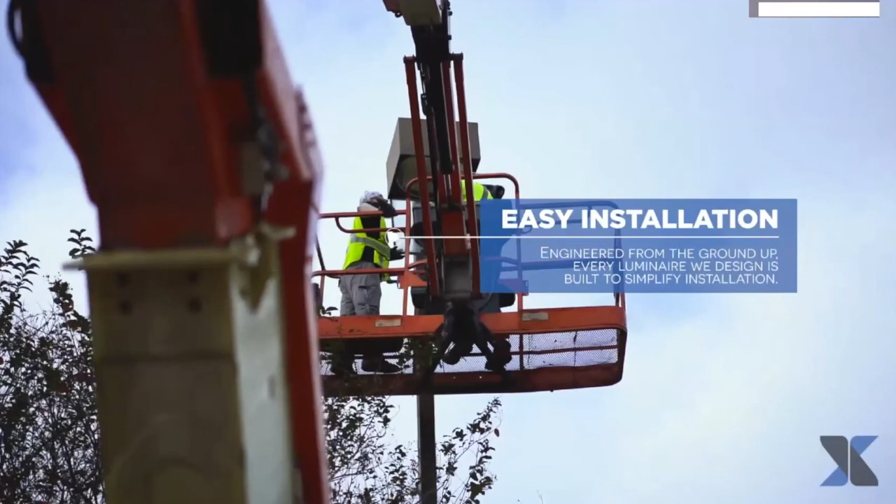As you can see in our web address, our URL, XLM, the M is for manufacturing. Today the term manufacturer has been stretched to essentially include companies that have grown their catalog by reselling someone else's products. At XtraLight, we're manufacturing our products. We have control and accountability. We're a vertically integrated manufacturer, and as our customer, this provides that increased level of comfort to you.

The vertical integration of our company provides for us being experts in 5 areas that we've identified as essential for our products. The first is engineering, testing, manufacturing, quality control, and on-time delivery.

I'd like to speak about engineering first. We're experts in engineering. We frequently encounter requests for mod to standard catalog items as well as custom. To define custom, for us it's a 100% customer design driven product. In addition, lighting layouts, application engineering, how about technical support? You can actually speak with the people who designed and engineered our products.

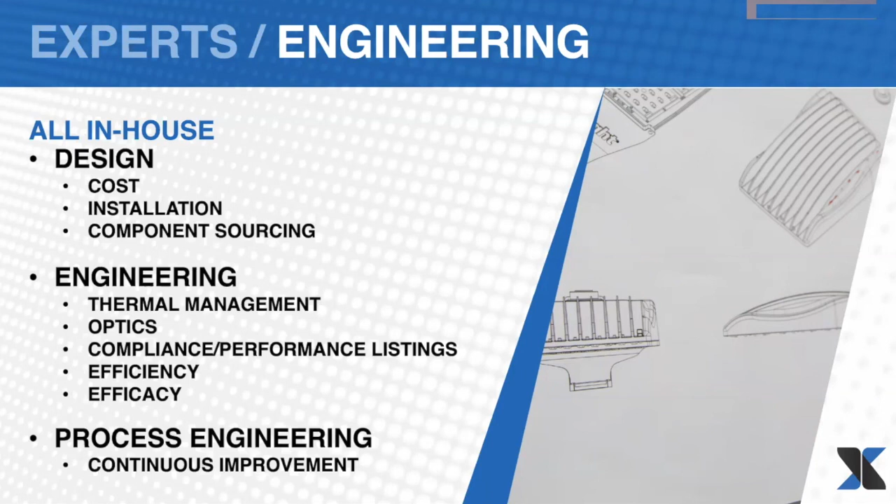Next, I'd like to speak about testing. At XtraLight, we own one of only 36 certified NVLAP labs in the entire country. As part of the compliance, we have a separate company, American Testing and Assessment Laboratories. While it's a separate company, it is still physically on site in our location, and you can see a number of photographs of our equipment.

We have 5 pieces of equipment. Our first is our goniophotometer. There are 3 classes, A, B, and C. We have a Class C. The Class C provides for both the mirror and the fixture to move and rotate a full 360 degrees. This allows us to capture all angle sets, any distributions, with accurate measurements. An example where this is really essential would be if a fixture has unique distributions - you have optics throwing light in specific directions. With our equipment, we can test for specific defined angle sets.

Our next piece of equipment is our integrated sphere. While our integrated sphere also measures the luminous output as the goniophotometer, we can generate that quick flash report. We mainly use this for color temperature and CRI. Now, our equipment has a larger spectrum than most equipment. Standard equipment is 400 nanometers to 800 nanometers. We modified and had our equipment recalibrated and recertified for a new spectrum, much larger, 325 nanometers to 1050 nanometers.

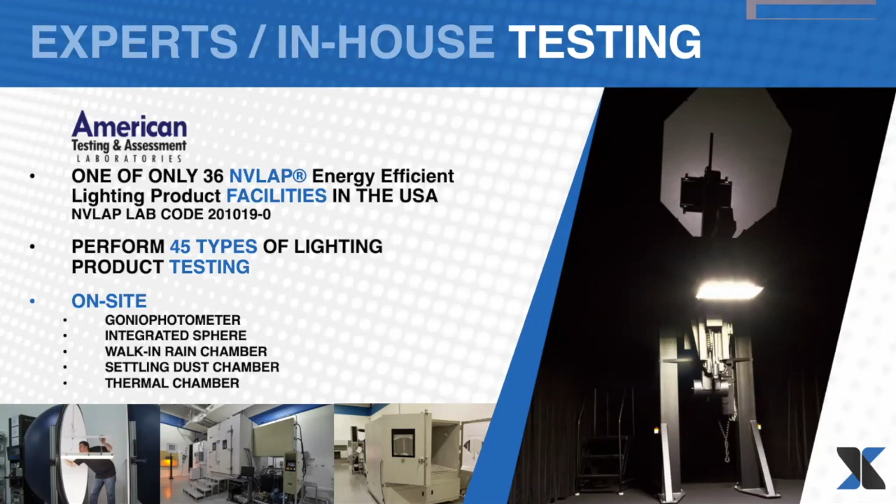Next, I'd like to speak about manufacturing. We own equipment, state-of-the-art equipment. We have 2 Trumpf 3000 CNC turret punch presses.

This allows us to punch up to 3/16 steel, almost 8 gauge. We have 7 Cincinnati press brakes up to 8 feet. We have an Amada fiber laser, that's what you see in the photo there. We also have a CNC roller, that's what we use for our ART and our ACR.

Next, I'd like to speak about quality control. And if ever there's a word filled with ambiguity, it's quality. What does quality mean to XtraLight? Well, at XtraLight, it begins with our 10-year warranty, bumper to bumper.

Next, all shop orders have attached electronic drawings, and we use 100% lot tracking in the factory.

Next, 100% first article inspection, and 100% every 25th article inspection. And that's not just for the final assembled luminaire. This also is our QC process for the component parts that we manufacture and go into the final assembled luminaire, end caps, housings.

Next, every LED board is 100% in-house single bin. We're not mixing diodes. There's a complete uniformity of color temperature. Why is that important? Well, as LEDs do not fail at once like fluorescent, and degrade over time, without single bin, the lack of color temperature uniformity becomes more and more pronounced.

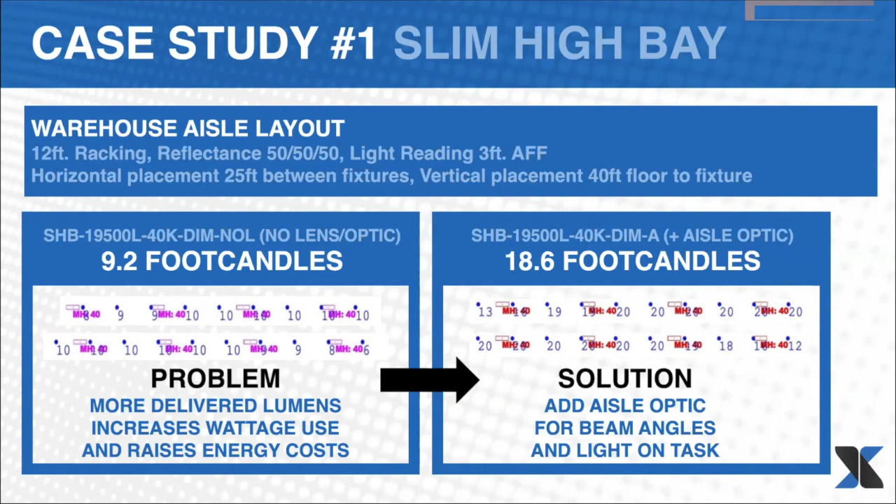In this case study, it was similar to the example Henry just talked about, where we were able to use specialized optics to hone the light in where it was needed, and we were able to bank on that extra energy or wattage savings to reduce the lumen package while still hitting the light levels we needed.

In this case, the customer wasn't too worried about electrical savings. Their main problem was quality control issues, which they thought were largely caused by poor lighting conditions, with supervisors unable to catch blemishes before products left the factory. The competitor on this job, when Major Tool asked for foot candle readings of 100 plus in most areas, responded by proposing to increase the wattage, which would increase the lumens and foot candles.

That light was honed in on where it was needed, and we accomplished the customer's goal of increasing foot candles to 100, while also yielding the customer a $250,000 per year energy savings as a secondary benefit to their primary goal of increasing foot candles.

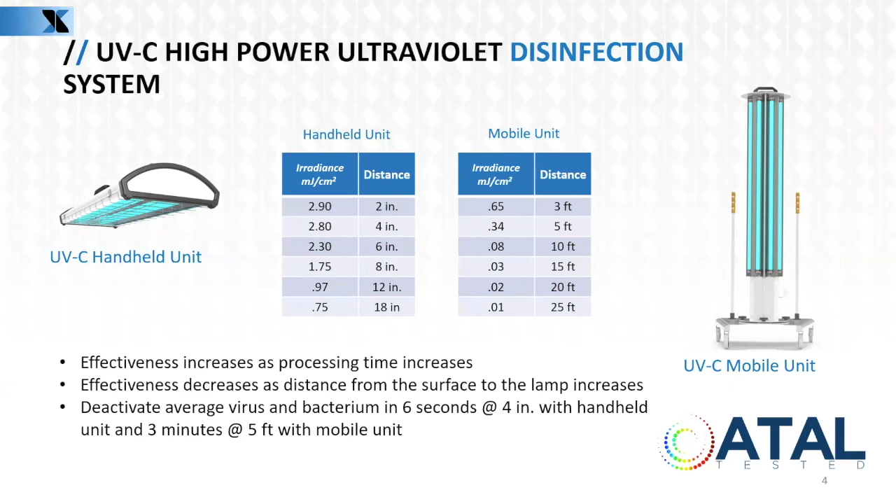So the handheld unit: it's very lightweight, very portable, used for tight areas or areas you may be constrained from accessing with the mobile unit, and for high touch areas you want to treat multiple times throughout the day, like desktops, credit card kiosks, lobbies, and things like that.

It's 2 feet long and weighs about 5.5 pounds. Total shipping weight is about 22 pounds, including all the PPE and the case it comes in. It comes with a nice mobile carrying case that has wheels and a handle, much like a carry-on bag when traveling. It comes with a 20-foot cord, and both the mobile and handheld units operate off a standard 120 volt outlet, so very common, easy to use, and easily acceptable.

It has a handle on the back and also a finger handle, making it easy to hold, with support for your other hand in case your arm gets tired. But like I said, 5.5 pounds, so pretty lightweight.

We use the 254 nanometer lamps in these. This one uses two 2-foot quartz glass lamps.

One question we commonly get is, why are we using lamps rather than LEDs, as LEDs are a more advanced technology? One reason was price. We wanted this to have an ease to market, and LEDs are $15 per diode prior to being placed on an LED board and installed into a finished good. So you need a large number of them to get the strength of UV light needed for it to be effective, and it would have tripled, maybe even quadrupled, the cost of the units if we went that route.

We'll move into the mobile unit now. Attached here is the mobile unit. It uses the same technology as the handheld unit, but in a 4-foot form factor rather than a 2-foot form factor. Each lamp still has the 1-for-1 configuration, so every lamp is paired with a ballast, and same scenario here: you're not going to have half your fixture go out. If you have a failure of a ballast, you'll only have one lamp out, and the unit will continue to be usable for disinfecting spaces until the machine can be maintained and a new ballast installed.

The height of this is about 5 foot, weighs about 65 pounds. Both the mobile and handheld units come with all the PPE you need to operate them out of the box, and they also come with some dosimeter cards, which I'll talk about in a bit. Lamps on this one still have the standard 9,000 hours and are still backed by XtraLight's UV warranty. The mobile unit operates at 320 watts and has some unique safety features I'd like to talk about.

The first one is dual power switches. The dual power switches are a unique feature that allows the operator to be intentional about the light being turned on—you're not going to be able to accidentally turn it on. You have to turn on the master power, followed by a secondary power switch.

The secondary power switch is Wi-Fi enabled and has a timer and an app embedded. That allows you to control the amount of time you want the unit to be used, and set treatment times based on how long you think it will take to treat a specific area, or based on dimensions and target areas. You can also turn the unit on and off based on that app, or just check the status to see if it's still on or if the timer has expired and the unit is now off.

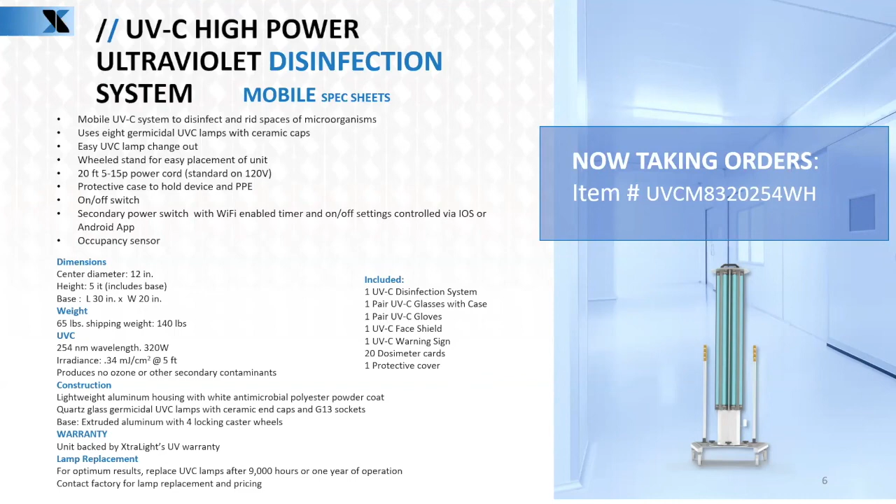Where can you use UV disinfection systems? You can use them essentially anywhere you have access to a 120 volt receptacle - locker rooms, schools, transportation, hotels, gyms, spas, retail spaces, restaurants.

A commonly asked question is, can you treat food with UVC? And the answer is yes. You may have some secondary side effects on the produce itself. For example, if you treat some lettuce with UVC, it may cause that lettuce to wilt prematurely, a little bit quicker than it normally would. That lettuce would still be 100% edible, and you would not have any secondary side effects due to any kind of contaminants.

All of our units do not emit ozone, so anytime our units are used to disinfect a space, they can be reoccupied immediately since there are no secondary contaminants.

How do we know UVC disinfection works? You heard me mention earlier that we include dosimeter cards with the purchase of either the handheld or the mobile unit. I have that picture here. This is going to be a key factor in validating that UVC works and that you're getting the correct dosage of UVC while creating a treatment plan. So that's your number one way to know disinfection works.

And the way this card works is that the center, which is yellow, will turn from yellow to orange when it's exposed to 50 millijoules, and then change from orange to pink once it's been exposed to 100 millijoules. We'll speak on these cards and the technology a little bit more in another slide.

You would be able to click on these once this presentation is shared. This is just some reference points that will help you convince customers that it is a valid technology when it comes to treating the coronavirus.

It is a small single stranded RNA virus that would reach approximately 4 or maybe even 5 log reduction with a UVC dose of about 30 millijoules. So if you're treating your target spaces at 50 millijoules, you're going to get well beyond that recommended 3 log reduction for like viruses.

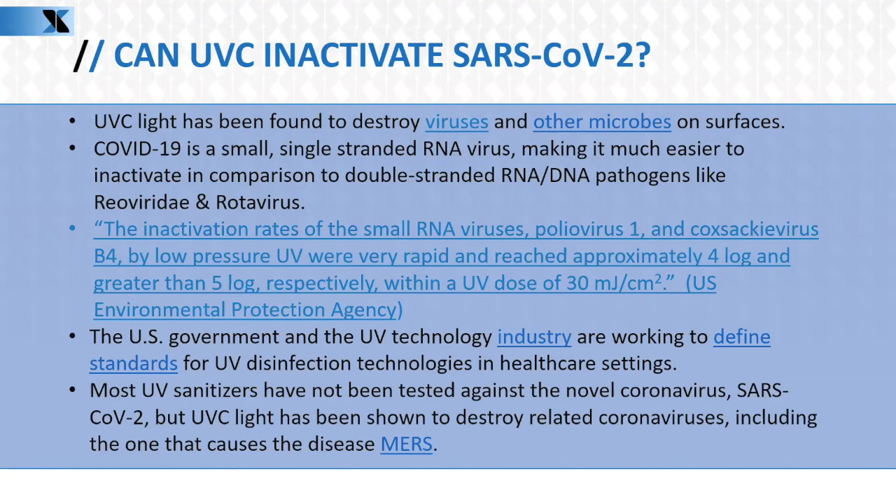All right, next you're going to survey your area to be disinfected. You're going to measure that space, determine where you're going to place your unit, and how far away from your unit your target areas are.

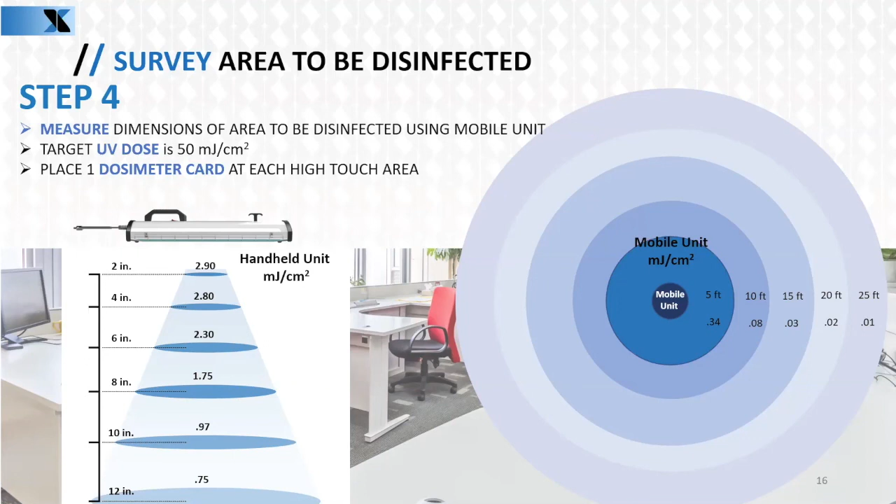You're going to place your dosimeter cards at high touch areas and possibly the places farthest away from the unit. The reason for doing that is if you place dosimeter cards at the farthest point and it hits 50 millijoules, then spaces in between that would have been exposed to higher numbers.

All right, next is calculating your estimated exposure time. So I showed you a quick calculation on, based on your irradiance and based on your time, how much exposure you get. Now we're going to work that calculation backwards.

So if you have your UVC dose that you want to treat an area with - and in these examples we're using 50, since that's what's recommended - and you know your UV intensity out of the unit based upon your radius or size of the room, you can calculate how long you should treat that room for. It's going to be simply dividing.

So we're going to walk through the first row there where it says handheld at 4 inches treatment distance. We're trying to figure out what our exposure time is going to be at 4 inches away from a target object, and how long it's going to take us to hit that 50 millijoules.

You'll cross-reference your distance to the charts provided that show the irradiance of both units. At 4 inches, our irradiance on that handheld unit is 2.8. So we take our target dose of 50 and divide it by 2.8, since that's our intensity, and we get 17.85.

That's going to be your exposure time. One thing to remember is that if that number is anything above 60, you'll want to divide it again by 60 to get your minutes, because it's always going to be in seconds.

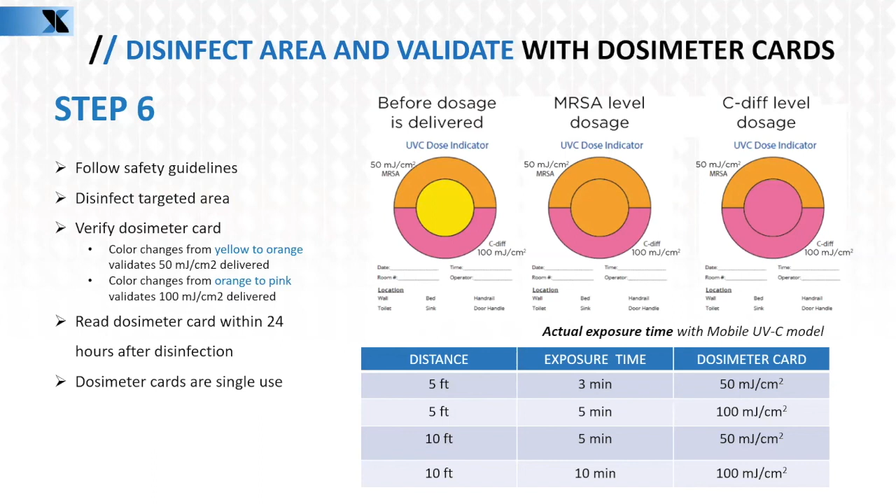So we always recommend, when creating a treatment plan, to use the calculation as an initial treatment time and then use these dosimeter cards to validate that treatment time. Oftentimes your treatment times will be decreased, so you can log that actual treatment time based on the dosimeter card, and that way those treatments can be replicated.

Just a quick summary: disinfection of air and surface with UV is a well-established technology. It's a little uneasy for people right now because it's in your face and new for a lot of people, as it's making its way into unorthodox or non-standard applications. Most of the time previously it was used in healthcare facilities, doctor's offices, surgery centers. Now, with the lack of solvents and other things not readily available, and for the ease and reassurance of consumers and employees, people are looking for better ways to disinfect spaces. So it's become more in your face now, but it's definitely something proven to be effective and used for a very long time.

Like I said previously, we use the 254 nanometer UVC products, and it's the predominant wavelength used today due to its high effectiveness. Always make sure operators of these units limit human exposure. Also, exposure of materials subject to photodegradation should be protected—expensive paintings, or organic materials like insulation that could be exposed to UVC can degrade over time. Just make sure you're thinking about that prior to treating a space.